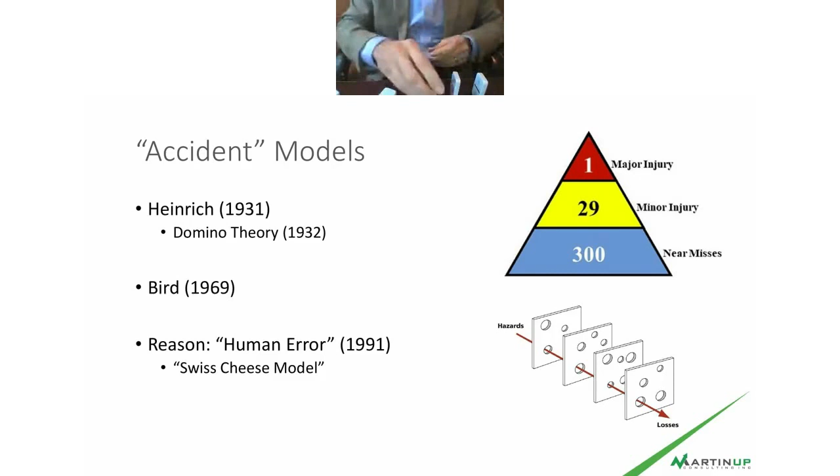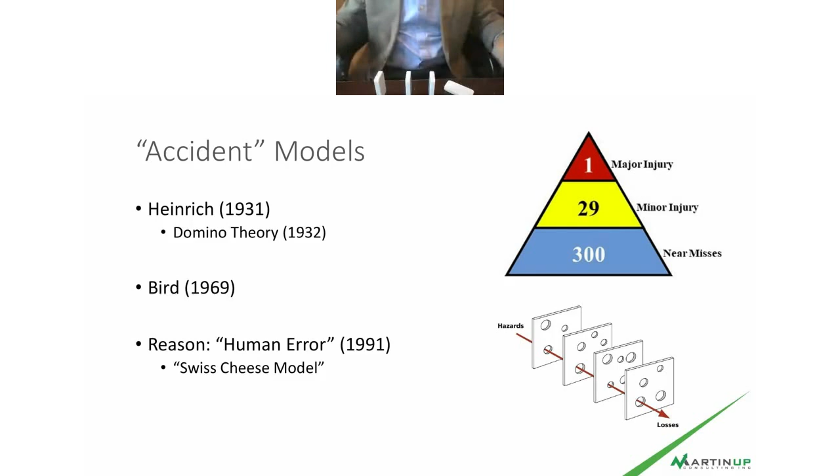A couple of years later, the same guy, Heinrich, came up with what he called the domino theory of accident causation. What that referred to was, if you had a set of dominoes lined up, and each one represented a sequential step or an event or a condition, and you were to knock those dominoes over, the last one being some sort of harm, there's nothing that can happen once those are set in motion. What Heinrich theorized was, if you take any one of them out of the array, it doesn't even matter which one, that final domino never falls. The harm never occurs. So that was some of the first inklings of thinking about prevention in safety modeling.

Then if we fast forward again, James Reason in his book Human Error in the early 90s gave us the Swiss cheese model. So we're thinking about prevention at this point. We're putting some levels of protection or barriers in place. Now none of these barriers on their own are completely impervious. They do have their weaknesses, sort of like holes in Swiss cheese. And every now and then the holes would line up and that harm would be able to find its way through and have its effect on you.

So if we're thinking about prevention, we could put extra barriers in place. We could think about what the hazard specifically is. We could try and tailor our prevention efforts towards that particular hazard, make the holes a little bit smaller, make it a little less likely for them to ever line up.

And that's kind of how that one went. So using any or all of these models, we can't really predict the future to the point of buying lottery tickets, but we can definitely have a pretty educated guess on what may happen. Now, when we're starting to guess with people's lives at stake, we probably want to have the most accurate data set possible. So some of the factors that could go into that, there's quite a few different ones, and I guess that's what the poll here kind of refers to.

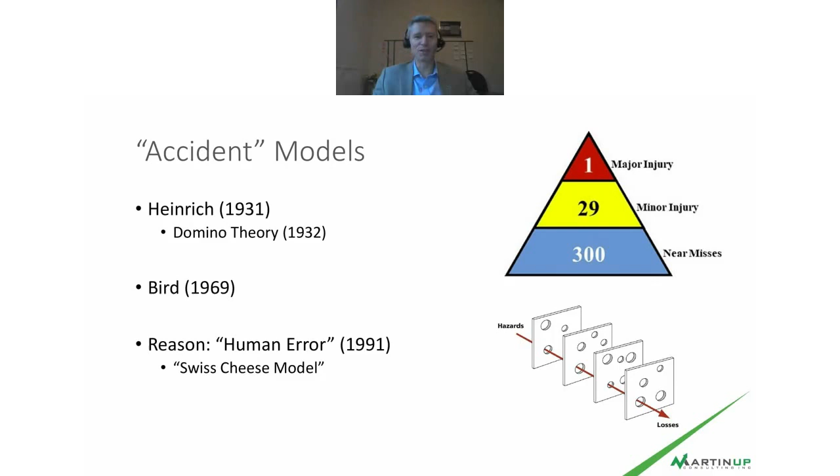So I'm quite impressed that we did get almost half the people going for the one that I was thinking of. So on the next slide, I'm going to focus to begin on the right side of the slide, since that was where my suspicion sort of lied. I see some last-minute answers popping in there. Most people would probably pick the recordable rate. Now, there's nothing wrong with that. That rate isn't without merit entirely. It's reasonably well defined. It does a decent job of comparing apples to apples across a wide variety of industries and organizations.

The problem with the recordable rate is those people have already been injured. You can't go and uninjure them after the fact. And that's the same for all of these lagging indicators. You're waiting for something bad to happen till you take the information and do something with it. So there's got to be a better way, right? We could look at trying to find out what could happen. And that's where the leading indicators come in. Those are things that haven't happened yet, but they're giving you some information on what might happen.

So one we might want to look at would be the hazards that are reported. Now, just reporting them isn't enough. I mean, hey, we had 1,000 hazards reported last year. Great. What were they? Oh, I don't know. Okay, so those numbers by themselves aren't worth anything really. It's what those numbers represent that have the real value. So subcategorization. Now you can slice and dice these dozens of different ways, 100 different categories if you like. Again, keeping things high level, I'm going to suggest 3.

So environmental, property or equipment damage, or injury. Do they relate to any one of those 3 things? Whichever one of those buckets gets filled with the most hazards, that's where you direct your prevention efforts. Now within those categories, you can subcategorize again and slice and dice again, find out where the greatest hazard lies. That's where you direct your prevention efforts.

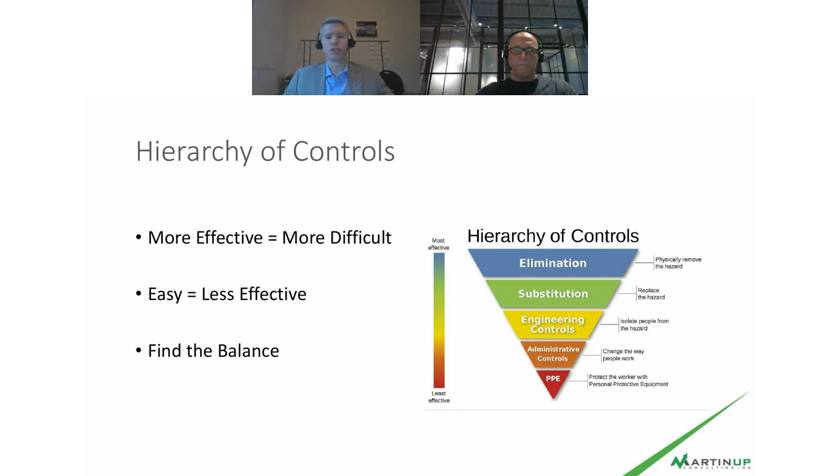So you look for these in your regular work, and then for the other presenters today, try and find: are they collecting data? Are they analyzing the data? Are they taking action based on what they're seeing? Are we looking at leading indicators versus lagging indicators? Are we looking to eliminate hazards? Those types of things, right? I think you'll be surprised once you start to look for them. You'll probably see them everywhere.

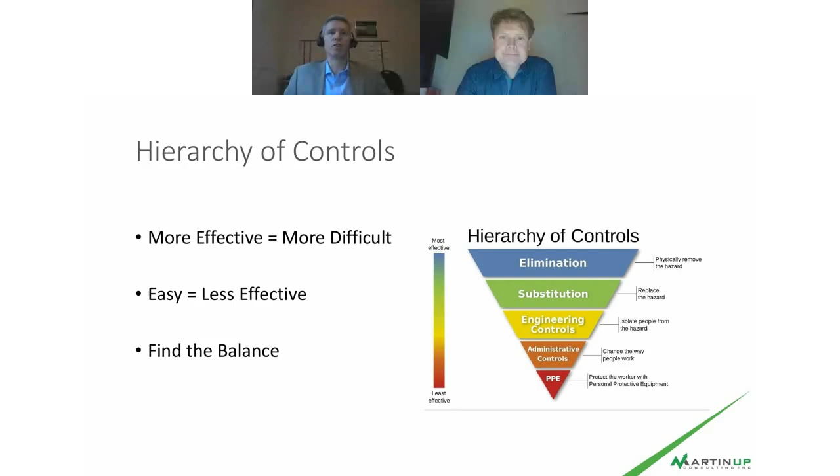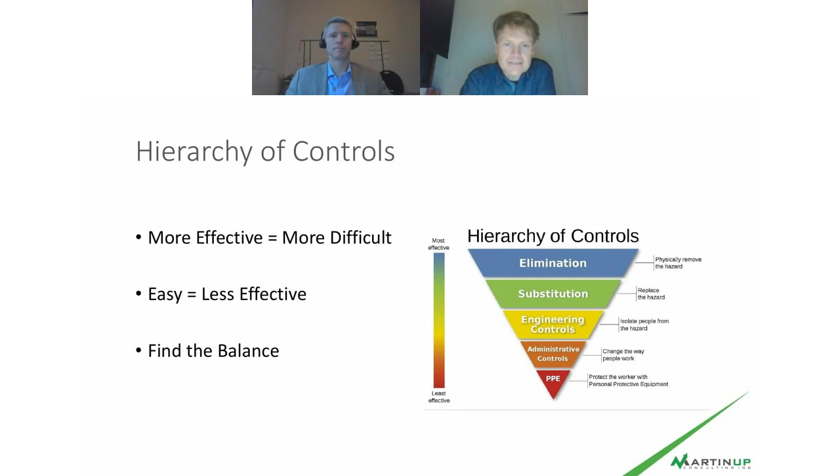Yeah, thank you. I'll just get my presentation in play like that. Right. So here you can see the title, Eroded Leading Edge Impact on Performance and Noise. And I want to present some of the work that we have done at DTU Wind Energy. I'm from DTU Wind Energy.

It's based in Denmark, and we are a department of 250 persons. We have an experience of over 40 years with wind energy, and we are working within aerodynamics, for instance, aeroelasticity, meteorology, composites, and structures, and almost everything within wind energy. But for now, it's aerodynamics, and I will just talk about some of the things that we have done.

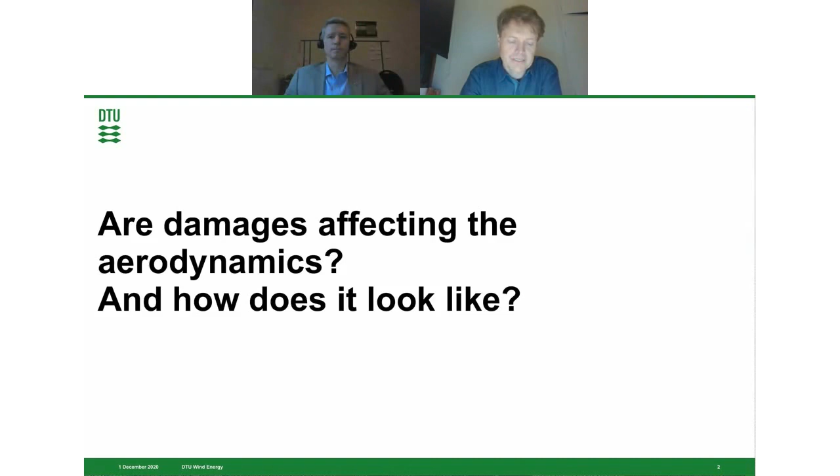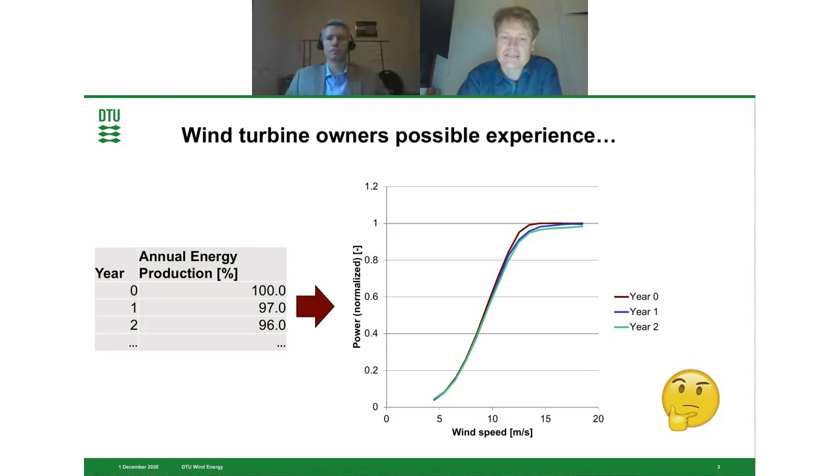You can see how the power degrades over time, and the annual energy production drops from 100% the first year, 97% the second year, 96% the third year, and so on. So something is happening here, and it could be many things, but it is likely aerodynamics that is actually causing this. So these are, for instance, photos of a blade, or actually 3 different blades.

So here you can see blades that have been inspected. Here you have, you can say, sandpaper-like types of damages where you have eroded the very leading edge, and this is probably just raindrops that have eroded this. So these raindrops are actually turning into kind of stone when the blade runs with 90 meters per second.

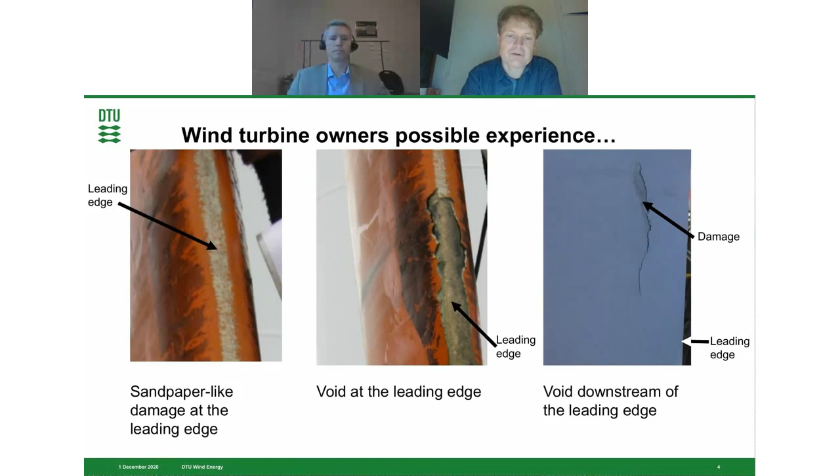It's fast, and it's much faster than cars and so on, because we are up at 300 kilometers an hour. Or what is this? It's 200 miles per hour or so. That's a lot. And this is another kind of damage, this void at the leading edge. And then we have other damages like voids downstream of the leading edge. So this is some of the things that you can see from real life.

And we have, of course, investigated this, and it is a bit difficult to investigate because there are so many different damages on wind turbine blades. There are more damages on wind turbine blades than there are blades, because probably there is more than one damage per blade. So we just have to find a way to investigate what degraded blades will do to the aerodynamics.

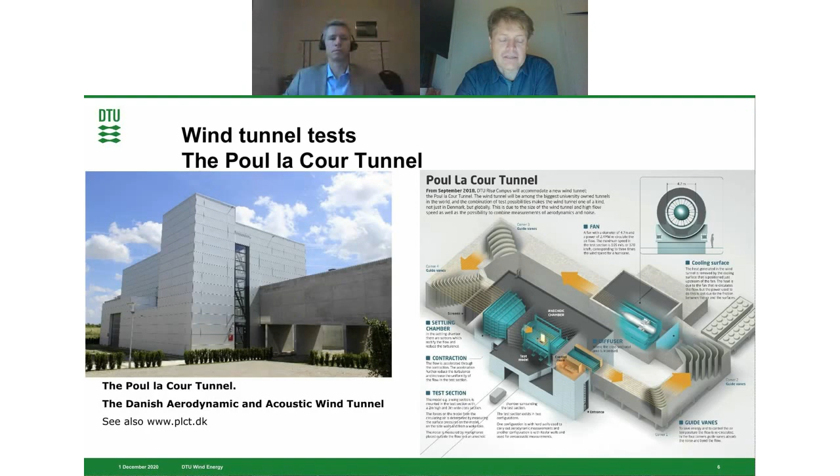We have used this fairly newly inaugurated wind tunnel at DTU, the Poul la Cour Tunnel, inaugurated in 2018, and dedicated for wind energy. So we are able to run at fairly high flow speeds with big models, and then we are also able to measure acoustics. So that's important in wind energy, and it's rarely done in wind tunnels that you can actually measure noise. So this combination is very nice with this tunnel.

And this is a photo from the test section, so you can see we have the wind in our back, and then we look through the test section, and we can see a vertically based airfoil in a test section that is 3 meters wide and 2 meters high. And this airfoil is mounted in a pitch bearing or turntable, so we can rotate this airfoil and find out what the forces will be on this airfoil.

And it's important to know the forces, because this is what creates both the forces on the construction, on the wind turbine, but also the power, the forces that actually drive the blades. So this can be quantified in the test section here. And then we have another configuration of the tunnel.

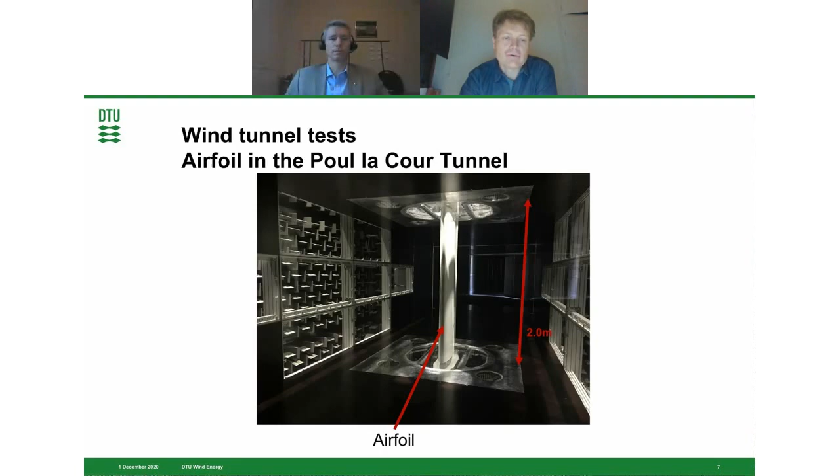So you can see, if I just go back, you can see these hard walls where you have windows in the walls, and then we have the Kevlar walls. Now you can see it on the left photo from the outside, where you can see the Kevlar wall and then a microphone array with 84 microphones.

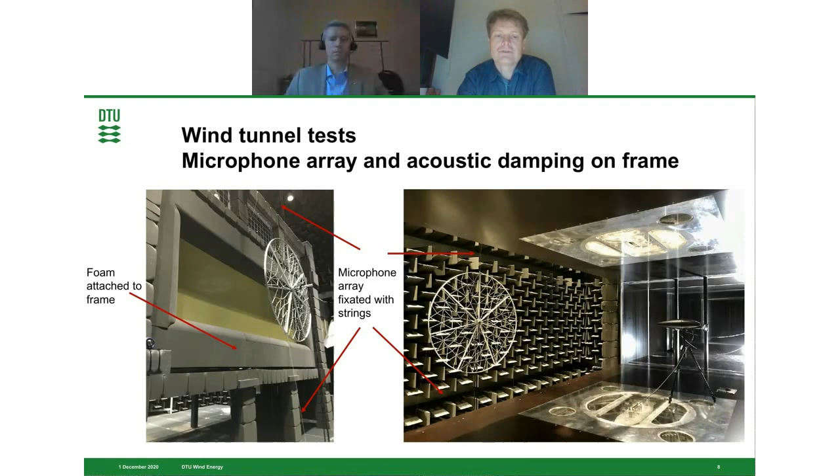And on the right picture, you can see a photo where this Kevlar, the yellow wall, has been removed, and now we are actually just testing the sound. So this is then the test section in this anechoic room, where we have these special walls that absorb the noise.

So how do we test damages? Well, this is just one example of how we can test these damages. This is kind of a sandpaper. There's the rough one to the left and the more fine one to the right. And this is simply just to test how the different textures of topology of the leading edge will affect the aerodynamics. So this is simply just two examples, and we have tested a lot of different other surfaces just to test what is happening to the aerodynamics.

So here are then some of the results from the wind tunnel. You can see in the mid plot, you have lift as a function of angle of attack, and then to the left you have lift as a function of drag, and to the right you have lift as a function of lift over drag. And what you can see is the maximum lift from the purple one, that's the clean case.

But if you use this sandpaper type, then this maximum lift drops to another level, from a lift coefficient of 1.4 down to 1.2. And that is almost a 15 to 20% drop in maximum lift. That is actually also going into the forces on the turbine, but also the power.

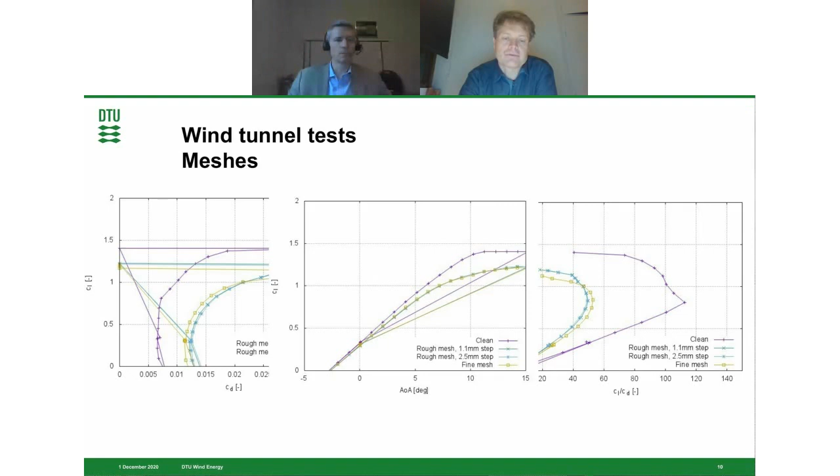And to the right, you can see lift over drag, where again the clean one is the purple, and it drops from 110 to 50. So it's more than halving the performance. So that's a lot. You can actually drop the performance by having something at the leading edge.

And noise is actually very new, it's not more than some weeks ago we tested this, and I haven't heard about noise being tested on leading edge damages before. But here you can see that in the clean case we have a certain noise level, but with a mesh we actually have a reduced noise level, at least at the lower frequencies. And that's interesting. This was at 5 degrees angle of attack. And if you go to 8 degrees, you have the same tendency, a decreased noise emission.

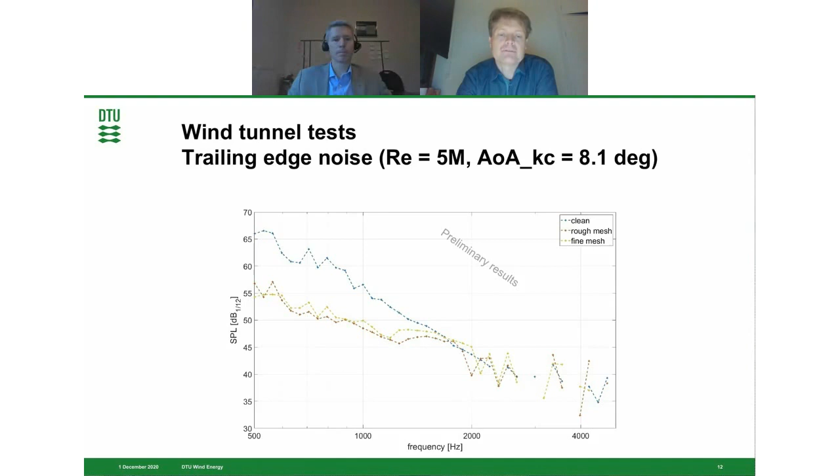But noise is kind of tricky. So we have to investigate this further to find out what this is actually doing to the rotor noise, because this is just on an airfoil. What's happening if we have this situation on a rotor? So that's important to find out. But this is very new, and I will call it preliminary results because we have to look into this further.

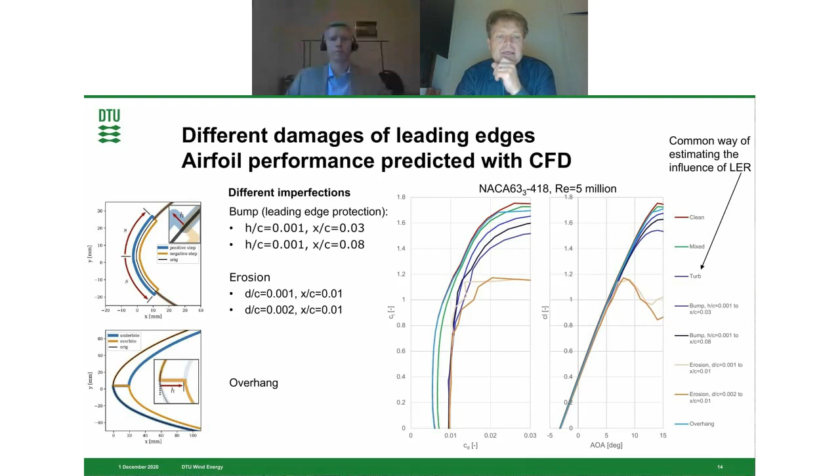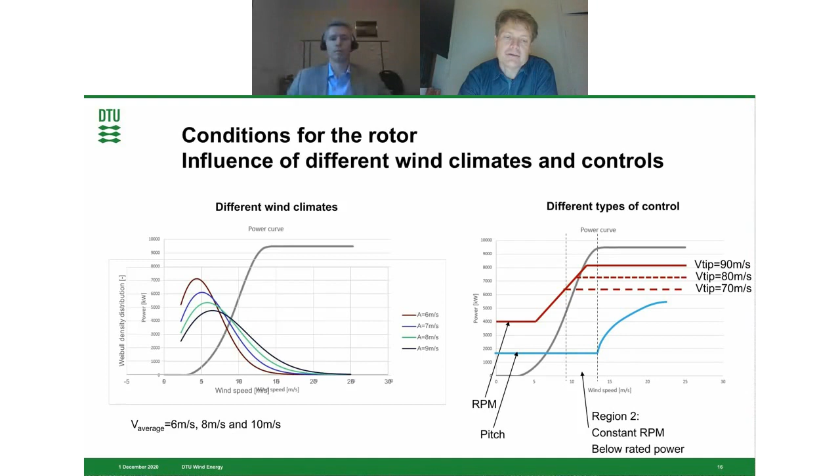So that's, you can say, the Weibull distribution, that you can change to investigate what this means to the energy production. And to the right, you can see what is happening if I change my maximum tip speed. So this is happening also for the higher flow speeds, that you change this maximum tip speed. So this is a study where we investigate the tip speed influence, and also the Weibull distribution, you can say the climate.

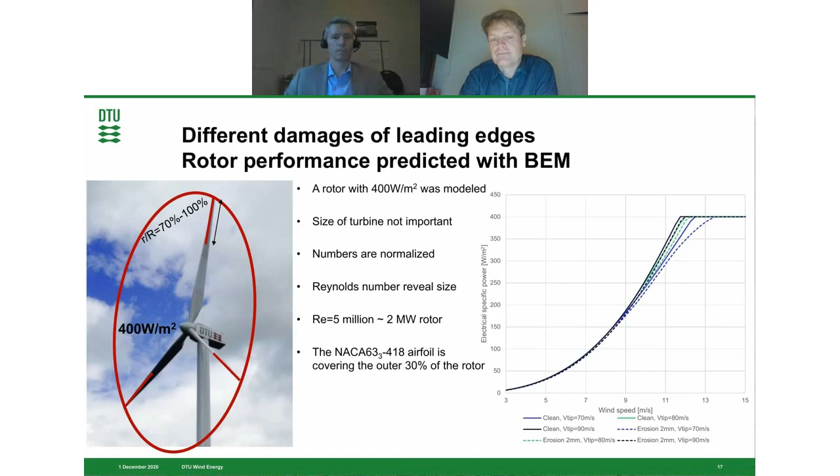So each of these plots can then reveal that if you have high average wind speeds and not so much damage on the blades, the outer 10%, then there is below 0.5% loss in energy production. But if you have low average wind speeds, 6 meters per second, and 30% covered with damages, then you can experience maybe up to 3 or maybe 4% AEP loss. So there's a huge difference in the losses depending on the site, how much wind you will have on the site, and how much the blade has been damaged. So how the eroded leading edges will influence the performance is very dependent on the turbine and the site, and this is what this is illustrating.

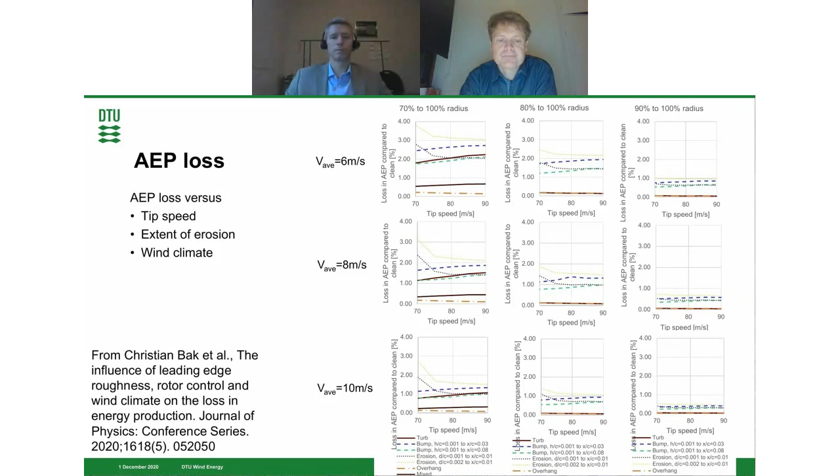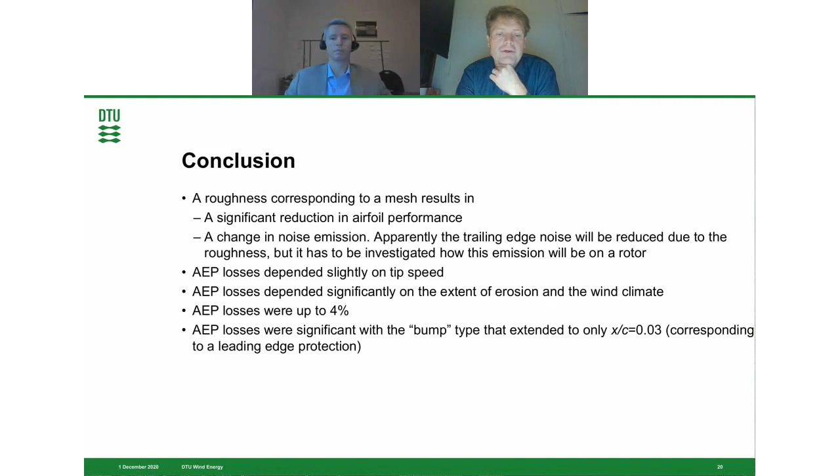AEP losses depend slightly on tip speed. AEP losses also depend significantly on the extent of erosion over the blade and also the wind climate. And we can see AEP losses, at least in this investigation, of up to 4%. And we could also see, and I really didn't have the time because there's so much to say here, that AEP losses were significant with this bump type that corresponds to a leading edge protection. Even if it is only the first 3%, that is actually causing some AEP losses. So it's also important to be aware of these bumps over the leading edge. So this was what I wanted to say. Thank you.

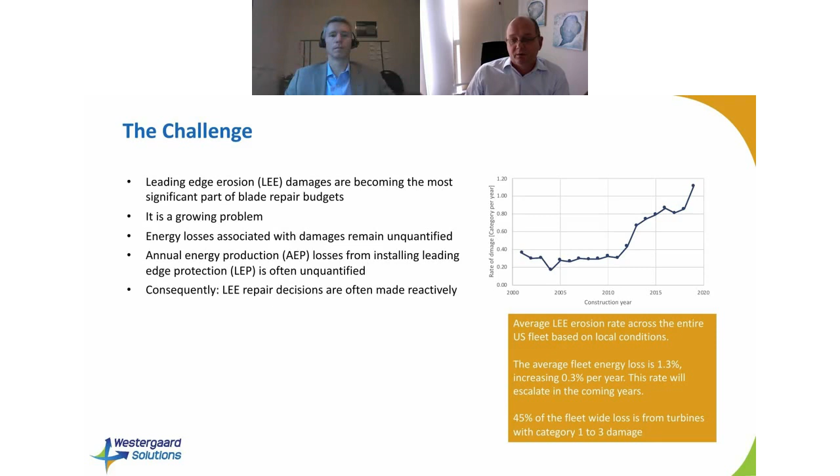And I also computed with the tools that I've developed the average loss of the entire fleet, and it's about 1.3% of the loss. But what's maybe more important is that it escalates about 0.3% per year. And so I'll get back to that and show some examples on that later in the presentation. And what may surprise you is that about 45% of the total loss of the 1.3% actually originates in damages from category 1 to category 3. So that may be something that you need to consider just as the basics for when do we want to repair.

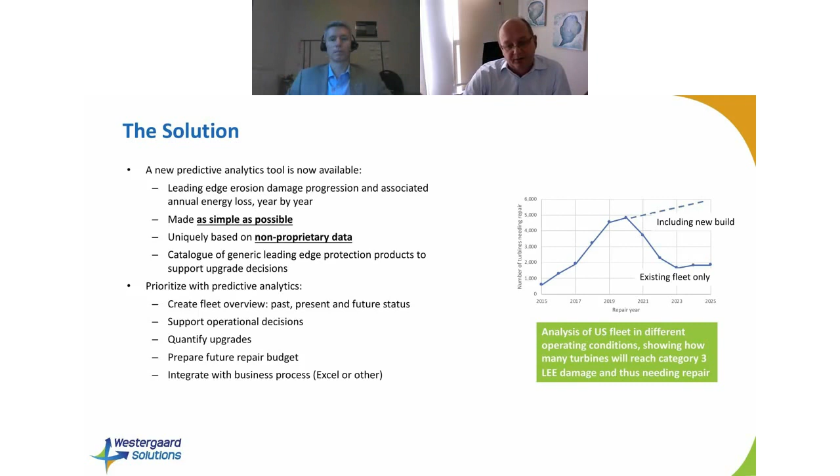If you take a step further and integrate visual inspections into the tool, then you also get a status, and you get a starting point that takes away the things that we don't know, for example, manufacturing flaws and individual variability from blade to blade. If you do that with a digital asset management tool, such as the one from Moderator that I've been working with, then you also get a lot of consistency into your process, and you also get a much stronger tool to do a full visualization of your entire fleet and the progress there.

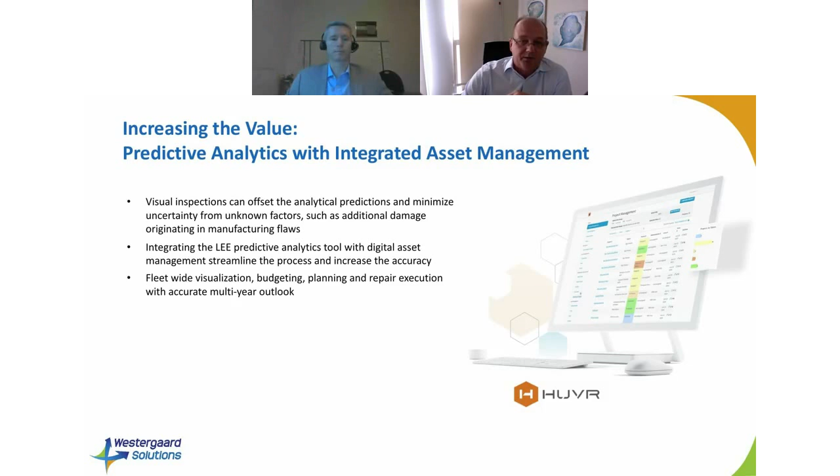So we will talk a little bit more about what this tool actually is. So it starts with a power curve. Christian showed some calculations of power curves. But one thing I'd like to point out is that the differences between the different damage categories are really small. And they're really smaller than you can measure from SCADA data and even very, very precise, long-lasting, accurate measurement campaigns. The tool is developed in Excel, so it's a common Excel spreadsheet.

So the power curve tool in itself, what you need is basic information: turbine rating, diameter, RPM. You need some default loss factors. You can tune them a little bit if you like to get the shape of the curve just right, but the default is pretty good. Density, cut in, cut out, and then wind speed or wind distribution on site, or you can just use the default Rayleigh distribution for trends.

And then when it comes to the leading edge part, the way I've defined the tool, it's not a scientific measure here, it's a definition. So simply you pick the worst category damage that you have on your blade, and then you pick the length of the damage, and that's how the tool works. That's all you need. You don't really need any details about what's going on in between.

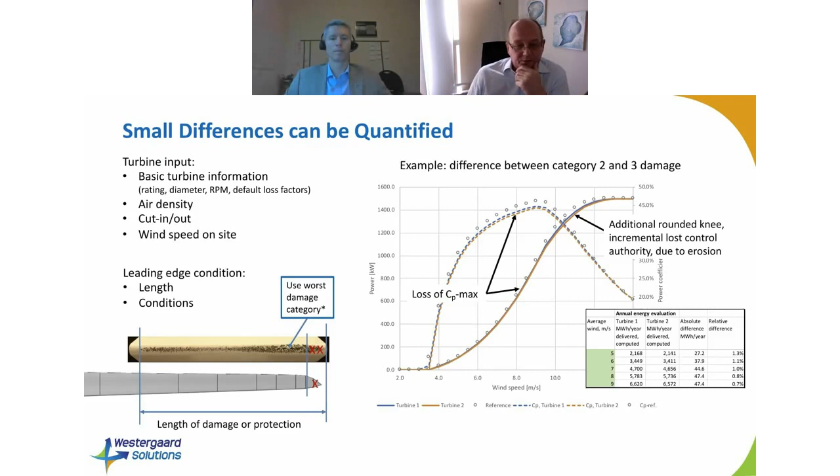And then in eagerness, we restored that with a leading edge protection product, and we thought we would do a really good job, so we added a little extra protection rather than just covering the damages. And we're ending up with a pretty disappointing result, I would think, for most people performing leading edge repairs, where the net loss is essentially the same. Right? So, okay, we protected the turbine, but our loss was not really recovered, which I would think we would try to do.

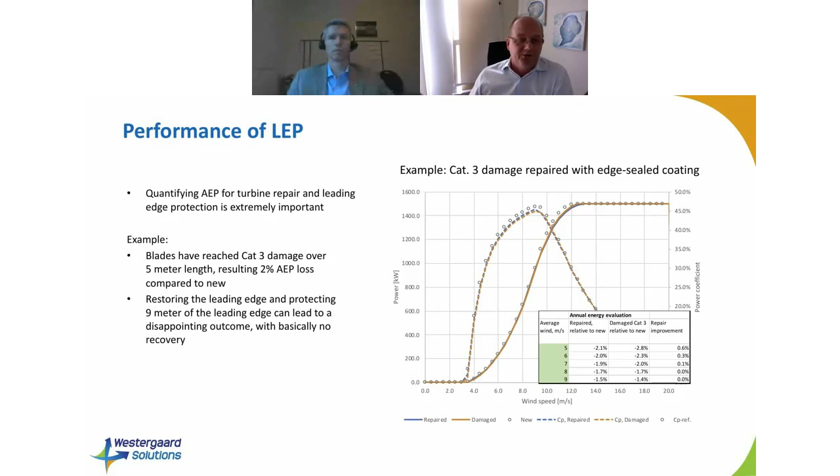The other thing we need to know is how strong is the protection that we put on, or how strong is the repair if we continue. And luckily, a lot of products are being tested very thoroughly. The basis of the testing is according to an ASTM standard. And one needs to be aware that UV light makes a huge difference in these tests. A lot of products deteriorate with UV light, so if they haven't been hardened with UV light for the test, then they will last a lot longer in the rain erosion test.

But the tool I've developed has the ability to take a data sheet from the vendor and convert these tests into something that's practically usable on your turbine. So you can then figure out what the strength of this is. These tests normally do not include the aerodynamic impact.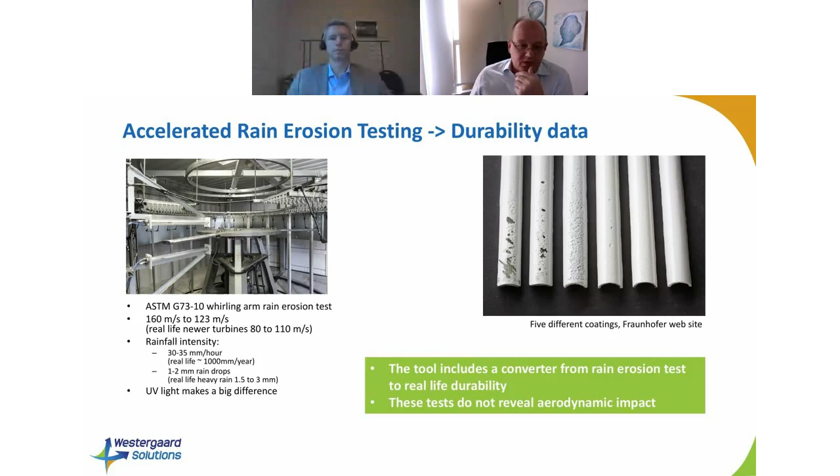And as Christian talked about in the past presentation here, the shape of that protection that we put on is important, and that gives us some additional aerodynamic losses. But before you get to that, I would encourage you to consider, whether it's tape, coating, sleeves, or whatever, to think about the application method. Because the application method is important. It can limit what we can do.

Do we need to upgrade the surface before we restore it? And are there weather windows to put it in that are different? And of course, install time and cost is a very, very important element. And really important to consider is also, what are the failure modes of this particular product? And what does it mean if I have to make a future repair? Can I get it off again? Is it easy to get off? How do we repair sections of the product, and so forth? Those are really important questions before you even start thinking about all the other stuff.

On the aerodynamic side of it, there's a couple of things to look out for, whether it's a coating, paint, or tape, or whatever. Waviness and ripples. Christian showed this net thing on there. You could consider that maybe it's sort of ripples in the paint. So if you do like a thick, gooey coating with some brush strokes in it, you get ripples and irregularities in the surface. That causes losses.

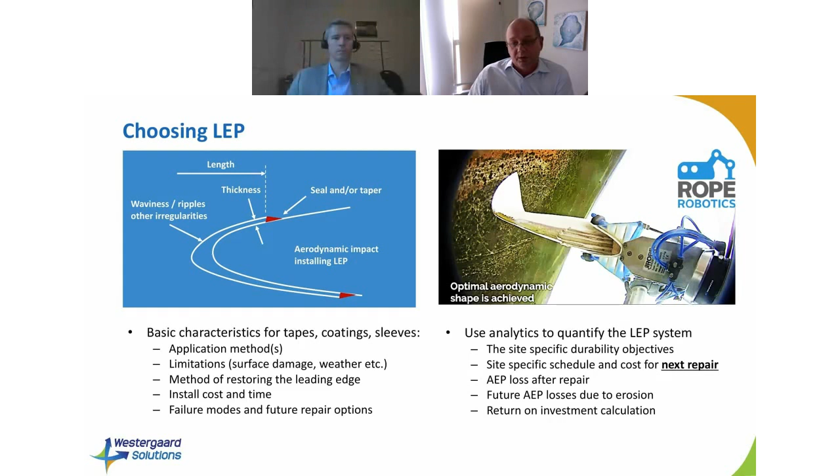So, like I said, with our analytics tool, you can actually go back and look at the specific durability compared to your site and the site-specific performance. You can look at the AEP loss after the repair, and you can also look at how it degrades over time. And then you can, of course, do return on investment calculations if you have that.

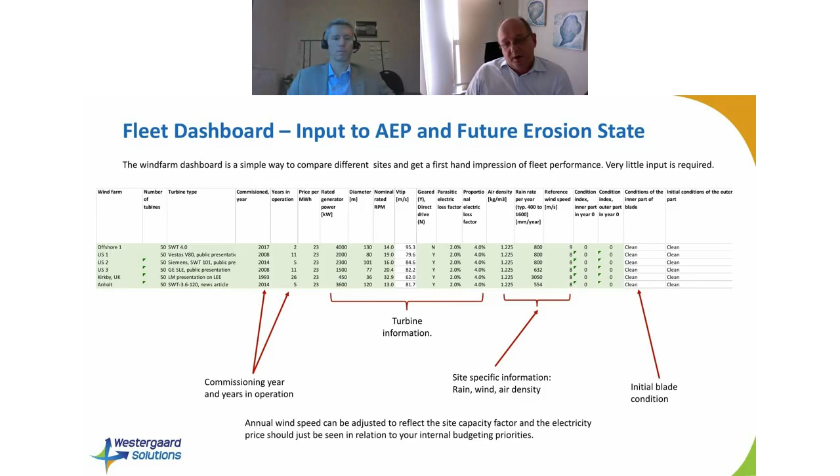So let me talk a little bit about how to create an overview, and then I'll go into a specific example as well. So what we need is basically some basic information. We need to know the wind farm, the type of turbines, how long it's been in operation. We need some basic parameters like the power curve, the rated power, the diameter, the nominal RPM. If we don't know the gearbox stuff, we can just leave it at default. We need some site-specific information, air density, rain rate is really important, and we need the wind speed.

We don't need the exact wind speed for each and every turbine. We can estimate this if we have a reference capacity factor or a reference production that we want to hold this up to. We don't need to know all the little details of this. Same goes with the energy price that we want to hold this up to. This needs to be held up to the budget of the repair, not necessarily the actual market price or something that may be more difficult to quantify. And then we need to know the initial blade conditions that we start with.

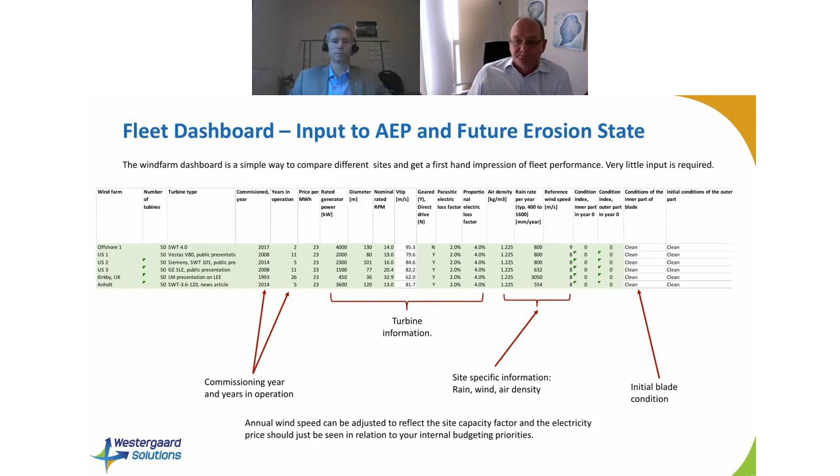So when you do that, we can create a dashboard or a fleet in here. I've chosen six different wind farms here. To the left, you see the blue bar indicates just the age of the wind farm. And the black and the red line indicate onset of erosion versus the category 3 level. So that gives you kind of a nice snapshot, but it doesn't really tell you what to do.

So the middle panel there, the blue bar in this panel indicates the actual damage progression from category 0 to 5. And so the blue bar is the status, but maybe more important is to know what happens in a year. Because if you're planning a year ahead, what you want to know is not what the status is. You want to know what it's going to look like next year. And you can now see that if you look at the two outer ones, the two offshore wind farms there, one has progressed a little bit more, the one to the right, but the one to the left will actually have a much larger impact due to the conditions on the site and the actual performance of the turbine.

So that gives a lot bigger impact. It also gives a lot bigger impact on the AEP. That's the last chart over to the right, where the blue bar is the status, and the red bar is what's going to happen in a year. So now you can see you can get a little bit more nuanced on your priorities just within your fleet, just with this snapshot here on wind farm level.

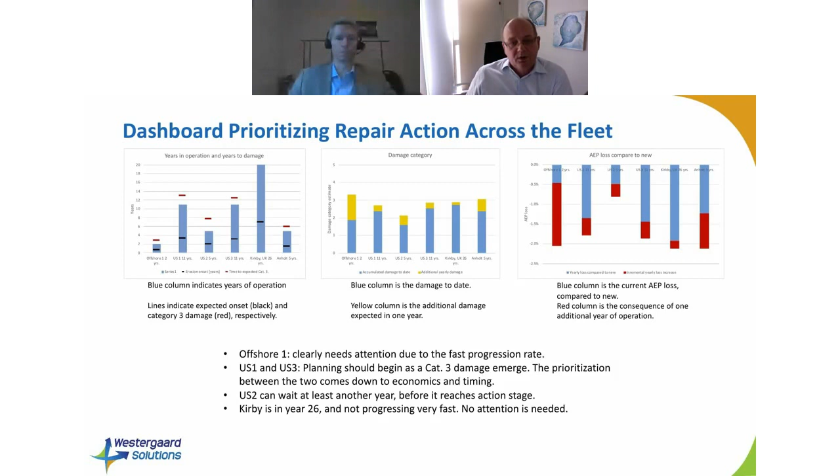But we want to take this a step further. So I went back to the database of the US wind farms, and I took the most predominant turbine out there. There's about 145 of them, at least in bigger farms. And they have rain rates from 280 millimeters to over 1,200 millimeters. And the dots over in the chart there show the age of the plants and then the computed erosion rate, or the AEP loss. Actually, more precisely, it's the capacity factor over time.

Relative to 100%. And so now you can see it's quite a large scatter there, and you can understand why some folks say, well, this is absolutely not a problem, or you can say this is a big problem. So you get quite a variety there. The dark line indicates the average of those 145 wind farms computed. And the light blue line is the regression line, and the scatter data stems from a Lawrence Berkeley National Laboratory study just done a few months ago.

I extracted those 145 wind farms out of that study, where they reported energy losses as actually reported into the EIA database over their lifetime, and then they wind corrected the data and computed the capacity factor development over time. So that's what the dashed line shows. So essentially, it gives you a sense of what the aging of the wind farm versus the erosion level is relative to each other. Erosion is pretty important on that.

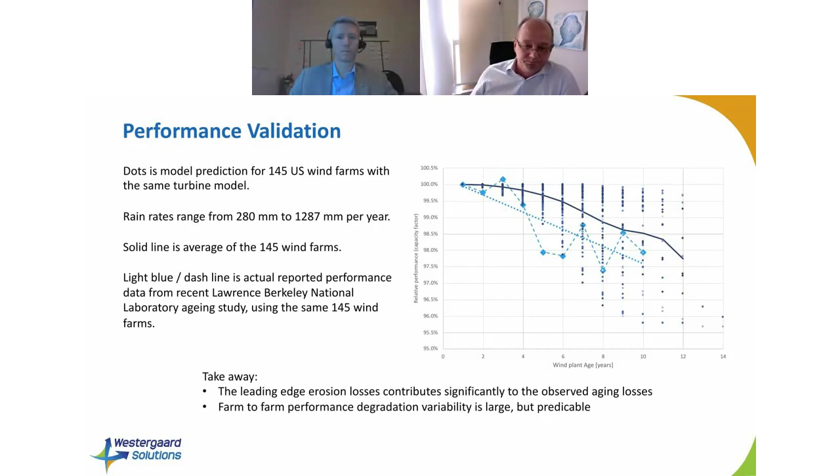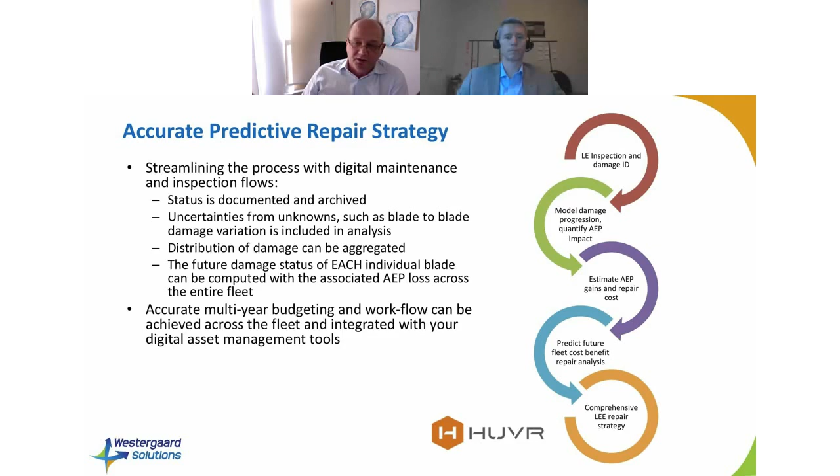Okay, so let's take it a step further and try to make our data more accurate. And we do that by adding inspection. And then we go through our process, we model it, we estimate the gains and the losses, and then we can do a multi-year budget across the fleet. So we'll make an example here of that. I call it my 5 turbine example. So I inspect in 2018, I inspect my 5 turbines. I inspect all 3 blades.

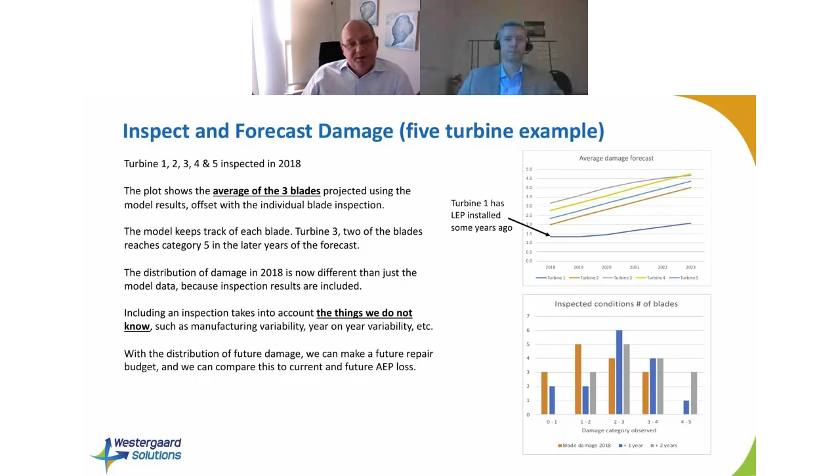And when I do that, I can go back and compare my predicted repair budget as I go out in the out years, and I can compare that to my lost production. So now I can get to a very well quantified status by the inspection and what's going to happen in the future. And then I can actually quantify what I am going to need for a repair budget and when I actually want to repair compared to my losses.

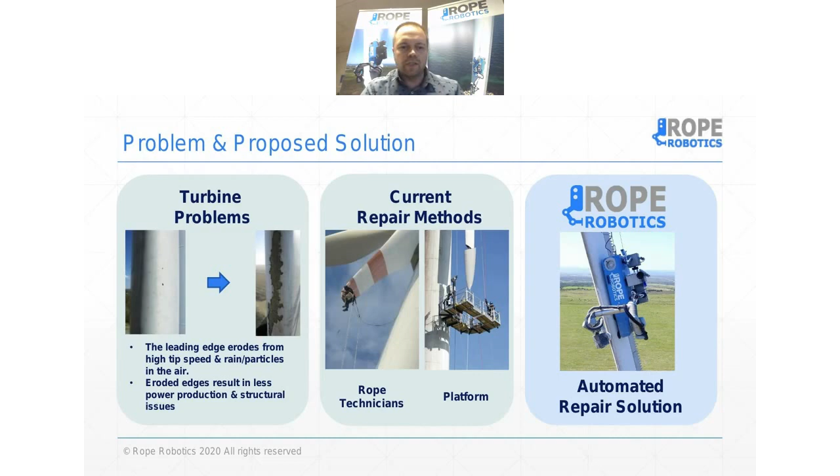What we have worked with here in Rope Robotics for the last years is to develop a robotic platform. So we can now put a robot on the blade, and then the robot will actually do the repair of your leading edge. So we now have an automatic solution available to repair leading edge. So how does it work?

Well, basically you send a technician up the tower, locking the rotor, attaching 2 ropes in the nacelle, lowering to the ground. On the ground you have another technician who has prepared the robot. He will then attach the ropes to the robot, and the robot is then hoisted. Then from there, the work can be done remotely. Typically, we have a trailer on site where we can control multiple robots.

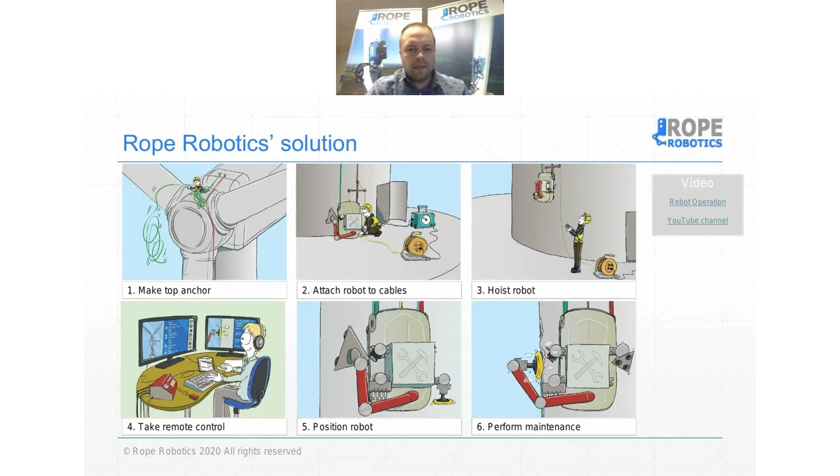The technicians will then be located safe on the ground, remote controlling the robot, positioning the robot where damage needs to be repaired, and then the robot will pick the various tools it carries with it and start doing the repair job. I do have a small video from some work we did here in Denmark. I'll just share it with you here. So this is from some work we did this summer here in Denmark.

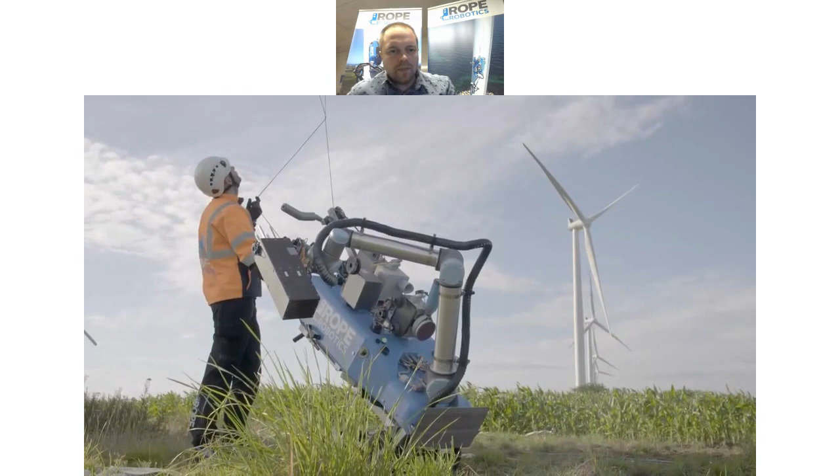I have my own technicians here, and they bring the robot on site, all trained and qualified to enter the turbine, lock the rotors and stuff like that. We set the ropes attached to the robot, as I mentioned before, and then we hoist the robot up. As soon as the robot is hoisted, it will eventually meet the blade, and then we pitch the blade, and the robot can then move down the blade and start doing the work.

All this is then carried out from this trailer where we have our technicians located, and they can control the robot. There's cameras and laser scanners and stuff like that, so they can monitor everything that's going on up there. And it's not a joystick-like control of the robot. They give it a set of parameters, and then the robot carries out the job, defining an area where something needs to be done.

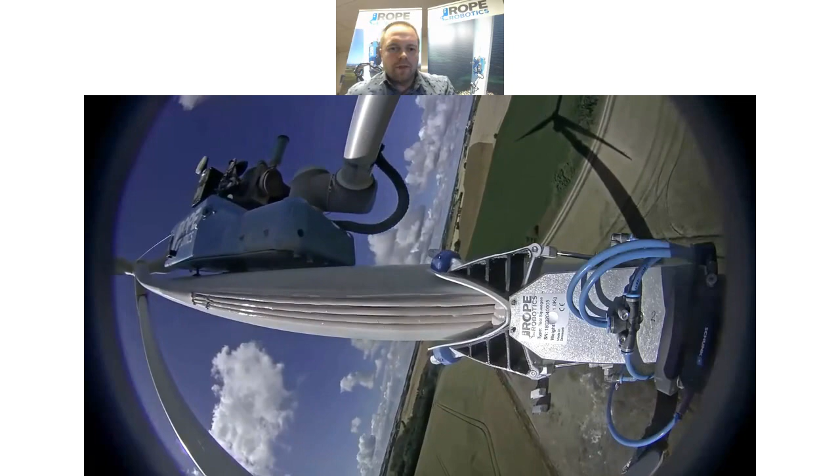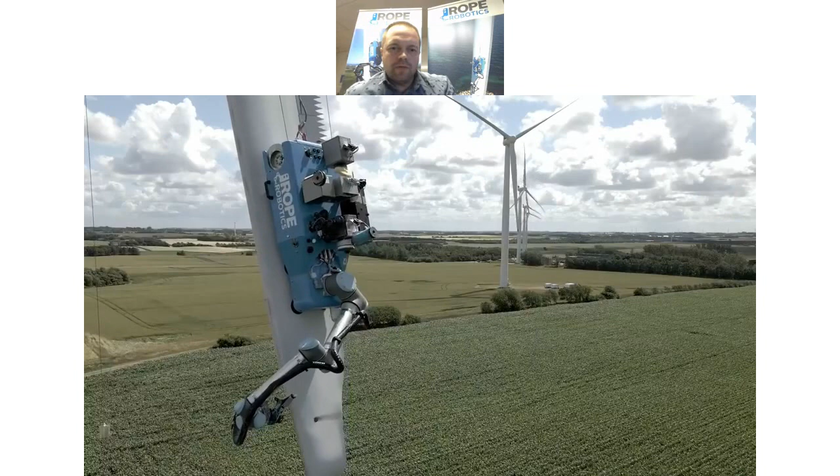And then we'll clean the blade, and here we'll apply some filler material and smoothen it, make sure we get smooth edges, so we don't get these aerodynamic bump downs. We can have multiple robots running in the same wind farm, controlled from the same trailer. And when one area is done, we move on to the next area and continue the job with the robot.

And here we also have a LEP coating. In this case, it's a wet LEP that is sprayed on, so it's paint-like, but still an LEP solution. So this is very basically how the system is working. And now I just need to get back to the slide deck here.

So I think our next thing here is a small question for you guys. I would like to know what your biggest concern is related to blade maintenance. Is it quality and how the documentation is done while the work is done? Is it health and safety? Is it the price? We talked a lot about the AEP, and Christian also a little bit about noise. Is that your major concern, or is it something completely different?

If it's something different, please put a comment in the chat as well, so we can see what you think about that. And I see we're getting quite some responses in here. A lot of people talking about quality and prices as well. So just keep voting, and I'll carry on my presentation a little bit more here.

So with the robot, one of the things we for sure can do something about is the quality and the documentation. With the robot, you get really high precision, and there's no cutting corners. When you have a robot up there, it always performs with the same high quality.

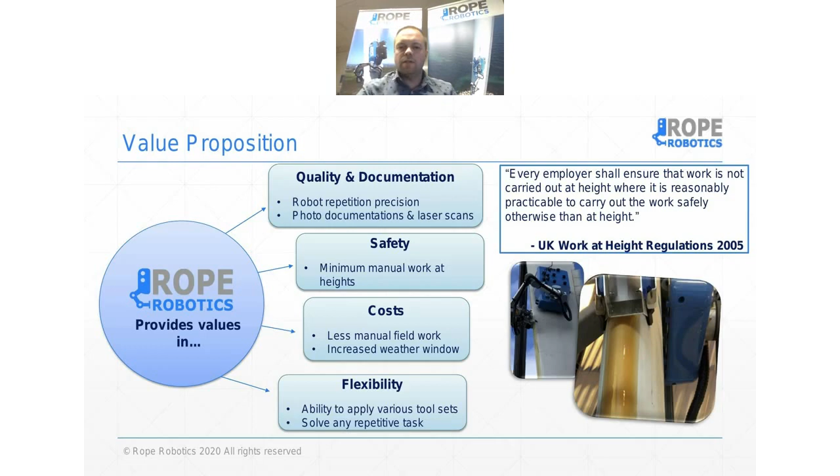And this metadata contains temperatures, humidities, who is the operator of the robot, what is the blade, where are we on the blade, what turbine, what robot. All this kind of information is stored together with each individual image and is automatically captured. So you don't have photo cards where you can't read what's on the card, or someone forgets to change the information on the photo card. All this is automatically available when you have a robot up there.

And the same, we have validation images taken in between each process step, so you get really a massive amount of documentation with our robot solution.

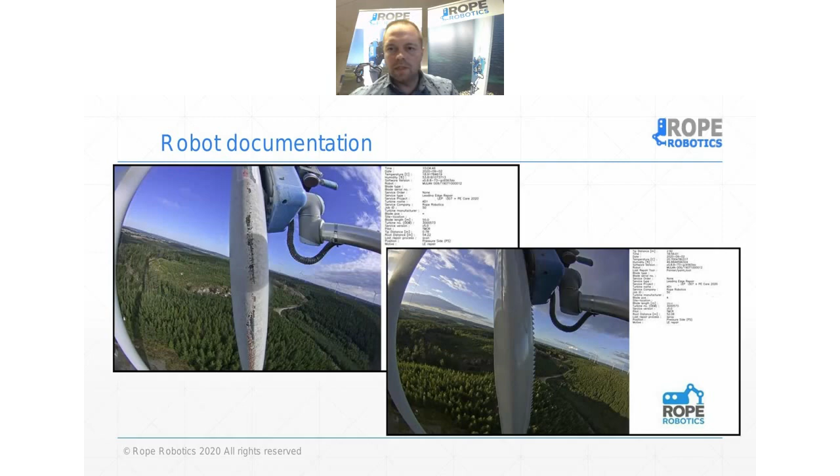So I think it's time for our next question here for you guys. I would like to know what your concerns are related to environmental limitations. Is your main concern related to wind? Is it the humidity? Is it the temperature? Is it lightning? Something different? If it's something different, please put a comment in the chat. Starting to get some inputs here, just keep on voting. I see humidity and wind are definitely scoring high here.

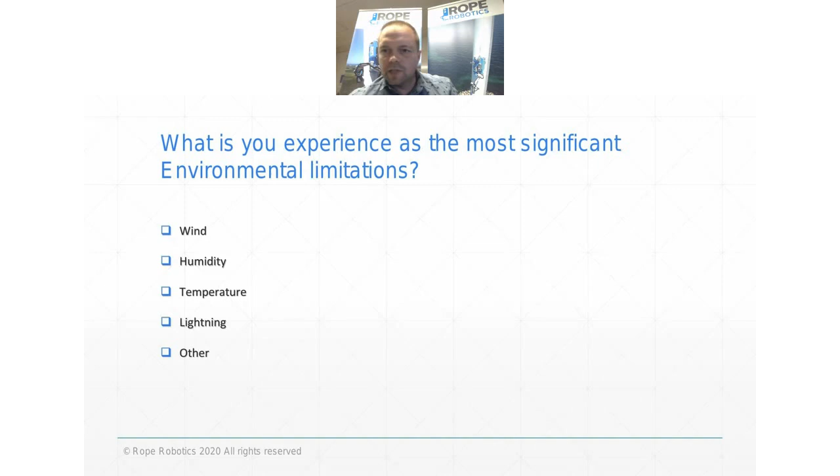So this is some inputs on our robot. We can work in quite high wind speeds. Currently, we've been working in 12 meters per second 10-minute average at the rotor height, with gusts of 15 meters per second.

Then I see not a lot of you talking about lightning, but actually the robot has an advantage here. We can work even though you have lightning in close proximity. As we don't have people up there, there's no risk to people from the lightning, so we can keep operating while there's lightning in the area. Although if we have lightning just above the tower, I would still stop the operation. Typically we also get some rain in these cases, but you have less downtime due to lightning.

And then there's the whole temperature and humidity part. It's very much dependent on the LEP material used. Here I put in an example of a map from the LEP material we're planning to use in 2021, where we can work from around 0 degrees up to 45, 50 degrees, and humidity up to something like 80, 85 relative humidity.

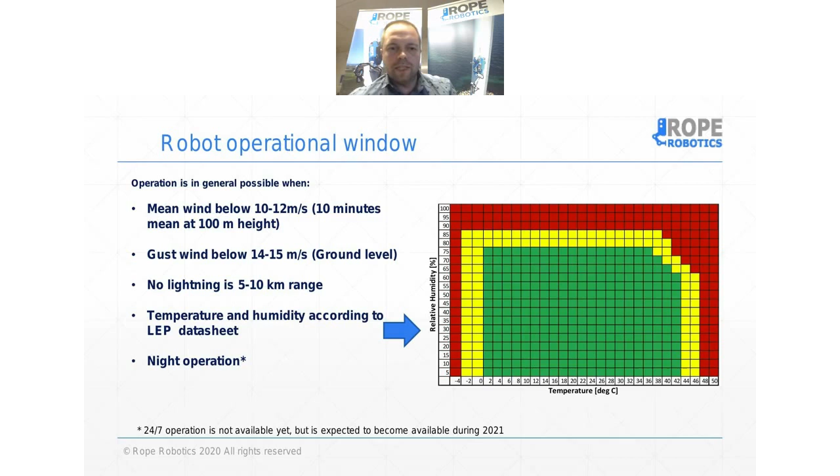And then we're actually also working on a solution so we can do night operations. During 2021, we expect to be able to start working 24/7 and have the robot working at night as well. In this way, we would like to help expand the weather window for doing maintenance of blades.

A little bit more about the robot and the whole system. The core of the system is, of course, the robot itself, the blue box with the robot arm that can carry various tools.

But that alone doesn't do the job. So to be able to work on site, we still need power supply, communication, we need transport equipment, we need our control center. So all these auxiliary systems need to be in place. Then there's our whole software platform, to enable us to do remote control of the robot.

This is also where we're starting to build AI systems. So we will in the future have a more autonomous robot, and in this way need fewer resources to control additional robots. On top of this, we then have various tools that do the specific tasks. So here I have a picture of a sanding tool that can clean and sand your blade before we apply the LEP, and our squeegee blade that will smoothen the surface of the filler or LEP material.

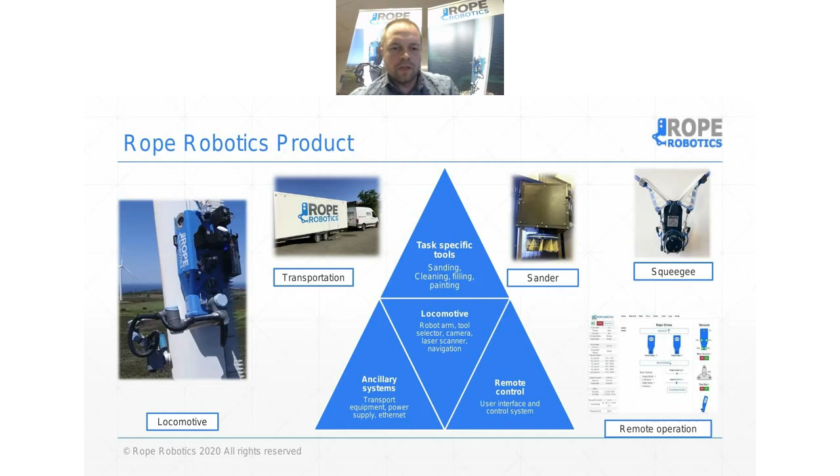So this kind of leads me to my next question for you guys. If we anyhow have the robot up there doing leading edge repair, what other repairs would you like us to do when we have the robot there? So we put up some suggestions. It could be inspection of the blade, inspecting the structure of the blade. Do we have any structural parts that also need repair? Is it checking the lightning receptors, drain holes, doing power curve upgrades, or if you have a vortex generator that fell off, placing it back on the blade again, or something else?

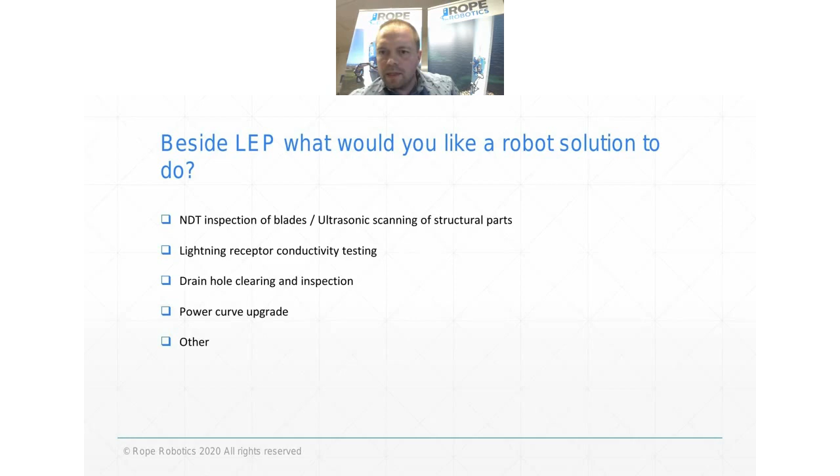And yeah, getting some answers here. Interesting. We actually have a project coming up where we plan to work on NDT inspection. So I'm happy to see that more of you are interested in that as well. But as I mentioned, it's a platform. So with a different tool on the robot and a little bit of upgrade to the software, we would be able to do other things on the blades when we are there anyway. So we would like to do testing of lightning receptors, maintenance of your power curve, vortex generators and stuff like that. And then we have this project coming up with NDT scanning. So hopefully we'll be able to provide that for you in the near future as well.

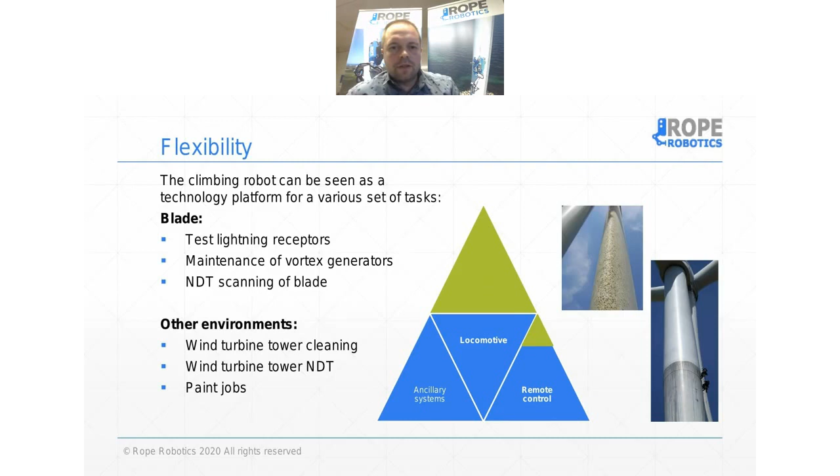So definitely the focus for us here is to have a platform to do blade maintenance. It's not just a leading edge repair robot. It's a blade maintenance robot that we are providing here. So let me sum it up. We have a robot platform. It's very fast and easy to mobilize. We have consistently high quality with the robots. We are able to increase the weather window where you can apply leading edge repairs or do other kinds of maintenance tasks on your wind turbine blades.

We are significantly reducing the health and safety risks when we are working with blade maintenance. And last but not least, we can customize solutions. So if you have a specific problem, we're happy to hear about it. And if there's a scale to the problem where it makes sense to automate it, then we can make a tool for the robot and solve the task for you. So that was pretty much my small presentation of the solution we have from Rope Robotics.

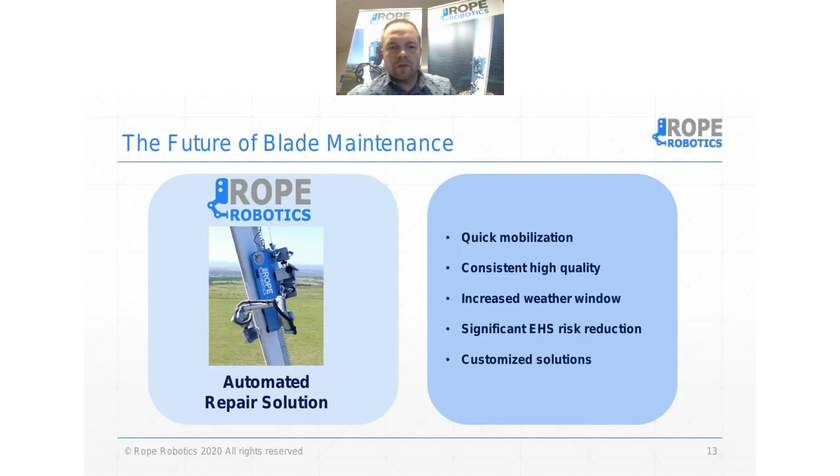Absolutely. Seems like quite a few have come in here. Just want to point out, I heard you say the word eliminate twice, so that's excellent. Score. Thank you very much. That's what we want to see. Yeah, and I also saw some triangles in there, so all the safety guys around the world will love the triangles. But yeah, we have 21 minutes left, so let's get into some questions.

So let's scroll up through here. We'll try and send some out to everybody, but we'll give Christian an easy one first. Is the bump a backwards facing bump?

What is the question about the backward facing step? Yes, so it is backward facing. You can say the backward facing step is in general bad for the aerodynamics, and what we can see from the computations and also from wind tunnel tests is that the more towards the leading edge we find the backward facing step, the worse this is for the aerodynamics. So we want the backward facing step towards the trailing edge.

And if we can actually also kind of fade it out with some kind of a slope from the edge and towards the original surface, then it's also very good for the aerodynamics. I don't know if this answers the question.

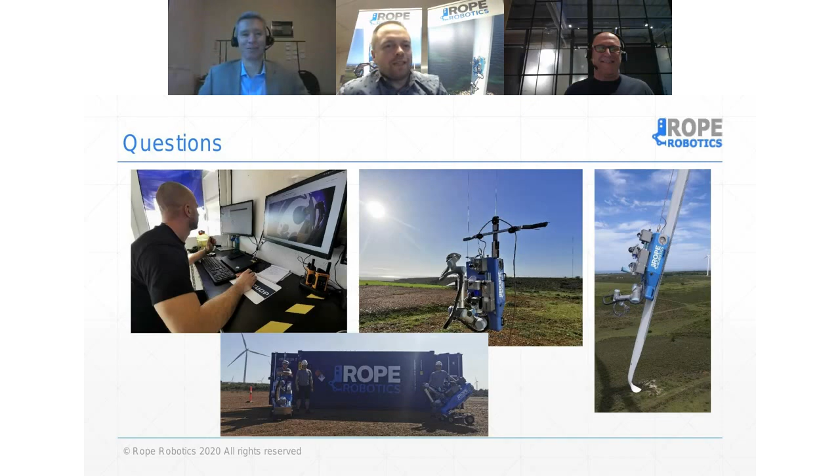So yeah, we're ready. Excellent. And does it come with its own mask, or does somebody have to put one on for it to stay 6 feet away from people? I don't think there's regulations on robots so far. I think we're actually allowed to have robots working without face masks so far. Perfect. Wonderful. But maybe the operator needs one. Yeah.